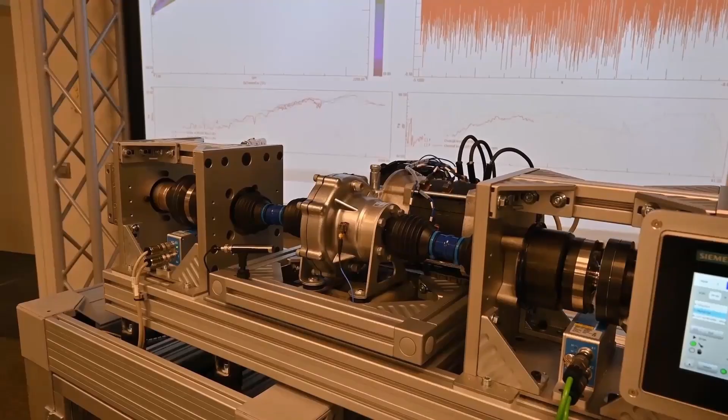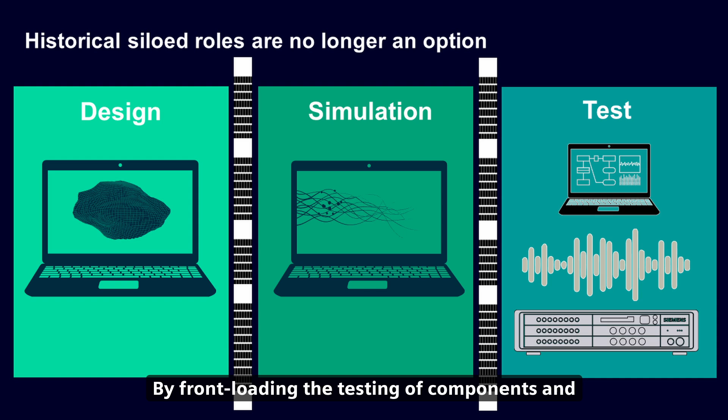To minimize the risk of discovering issues very late in the development cycle, there is a growing need to test the components that make up the full system, and then correlate and update the corresponding simulation model to ensure they accurately predict the real world. So it's critical for physical testing processes to be as accurate, reliable, and efficient as possible. By front-loading the testing of components and integrating tests with simulation, manufacturers can better evaluate many prototypes faster, earlier, and smarter.

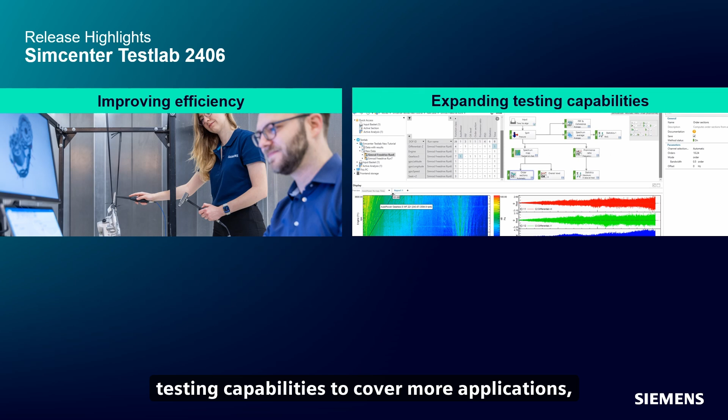With that in mind, the latest release of Simcenter Testlab 2406 is the right tool to help you in your journey to zero prototypes. The key focus areas in this release include improving the efficiency and ease of use, so you get your test results faster, expanding the testing capabilities to cover more applications, managing test data so you know which results go with which design variants, and extending process automation for greater throughput with less error.

On the journey to zero prototypes, the role of testing is definitely changing, but it's not disappearing. Instead, testing time is needed to understand the behavior of the components that will make up the final product. This could mean that even more data needs to be measured than is done today, and so improving testing efficiency is critical to your development process.

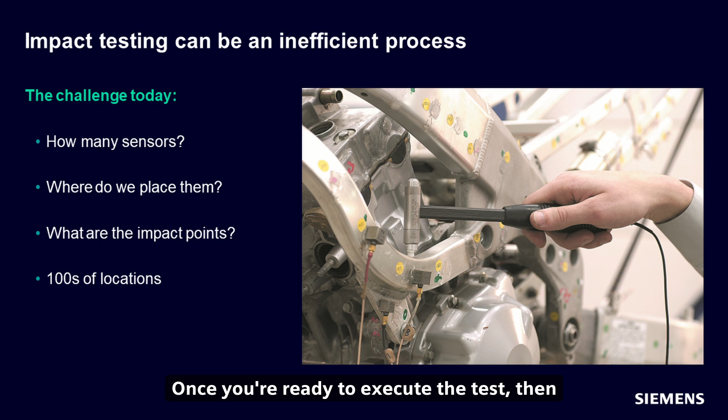Historically, impact modal testing has been an inefficient process. Where will you place the sensors and how many do you need? Where are the impact points? Once you're ready to execute the test, then you might need to hit hundreds of locations with a single hammer. This obviously can take a lot of time. Then, after the test, you need to analyze the data to fully characterize the modal behavior of the component. Now consider that you will have to do this for many components in your product, and you can see the need to improve efficiency.

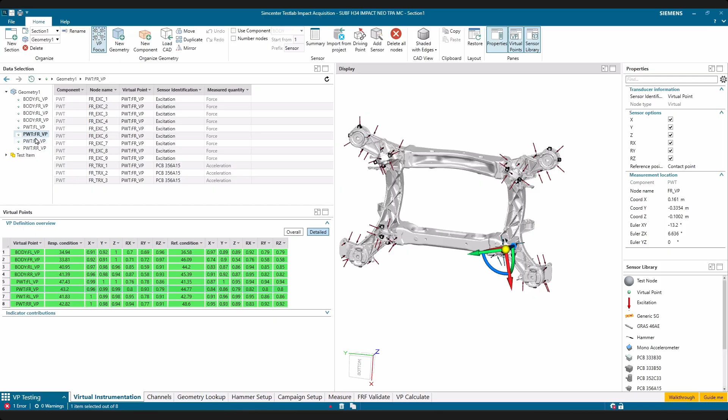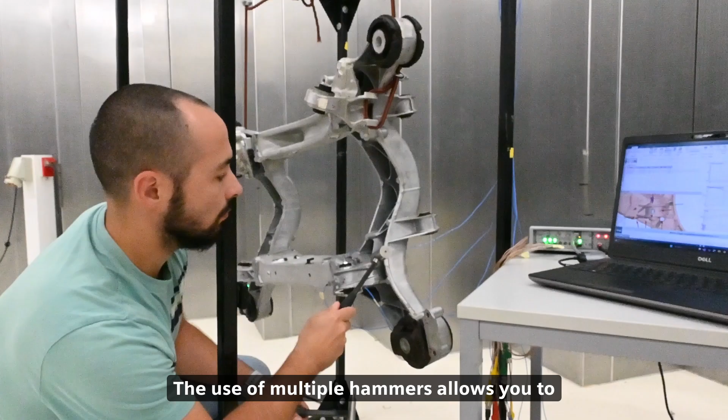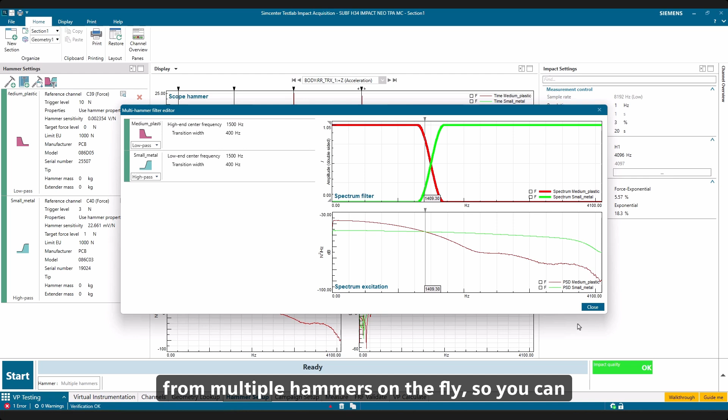With Simcenter Testlab 2406, you can reduce test planning time by using your existing CAD model to help define instrumentation and virtual points. The use of multiple hammers allows you to extend the frequency range, which is necessary for evaluating the unique characteristics of electric vehicles. Simcenter Testlab will then merge the data from multiple hammers on the fly, so you can see results during testing. Additionally, you can review which individual impacts contribute to the FRF, and they can be rejected if they do not meet the desired test quality standard.

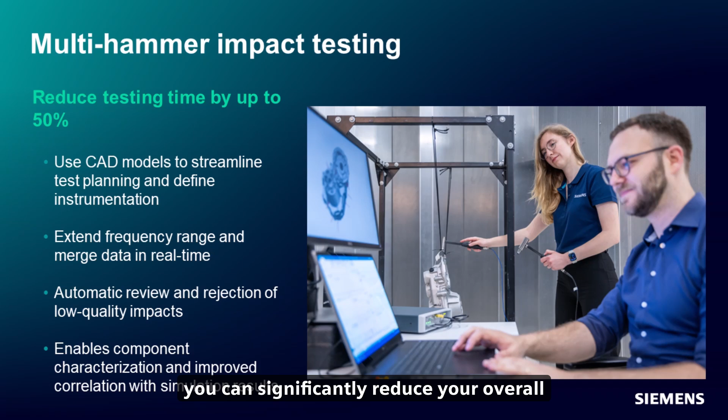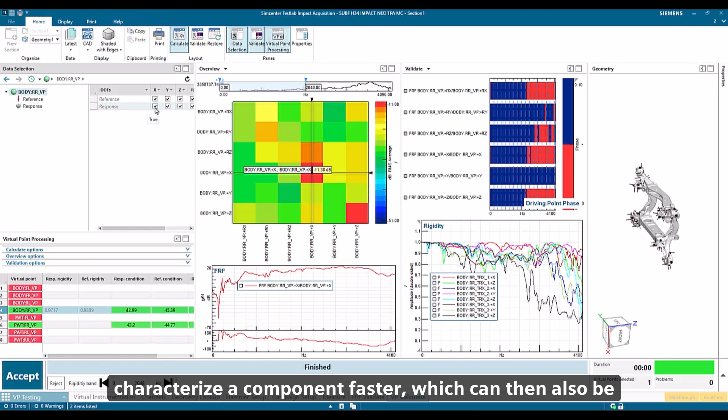Since you no longer need to change hammer every time and manually merge the data, you can significantly reduce your overall testing time by up to 50%, allowing you to cover more impact points in less time. Ultimately, these enhancements help you characterize a component faster, which can then also be correlated with simulation results to improve the virtual models.

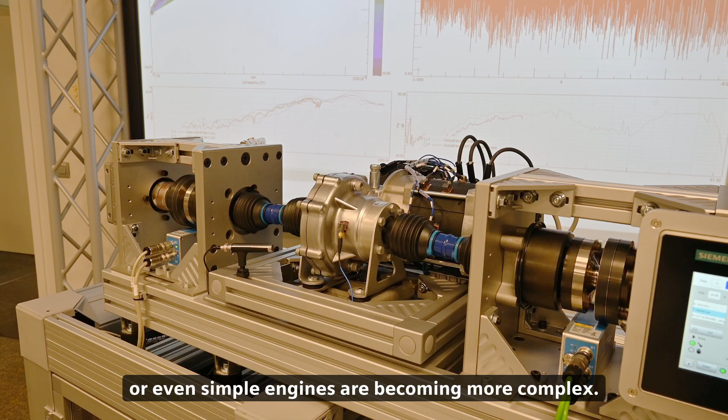Rotating machinery, whether it's an internal combustion engine, electric powertrain, or a small DC motor, is a major source of noise and annoyance towards end customers. Modern designs of gearboxes, complete aircraft, or even simple engines are becoming more complex. As a consequence, NVH testing tools come with so many options, settings, and sometimes hidden features that it's very easy to become overwhelmed, and getting efficient takes time.

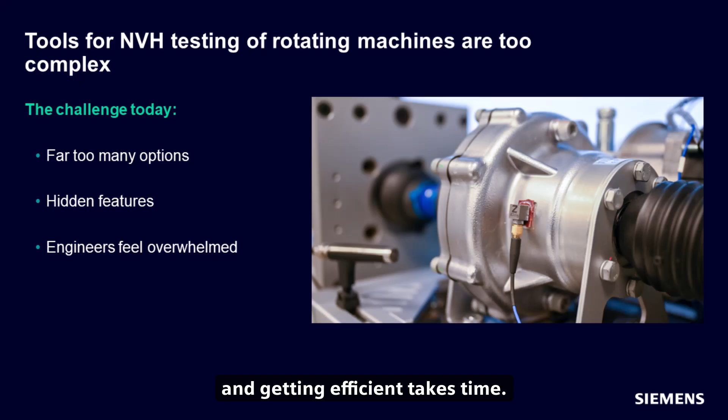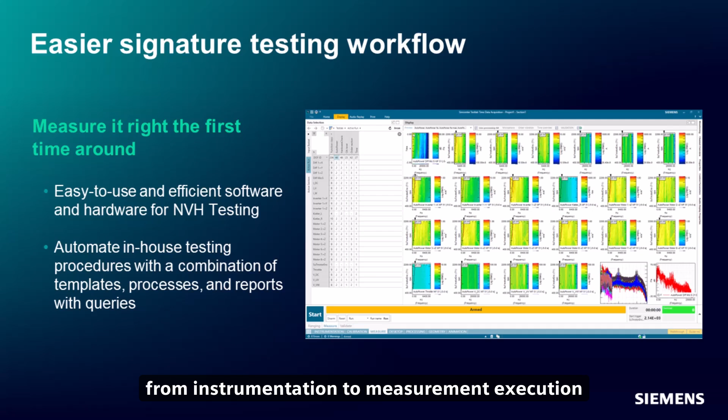A major goal for Simcenter Testlab 2406 was to make it equally easy for an inexperienced test engineer fresh out of school and a hardcore operator with 20+ years of experience on the job to perform a complete signature test. With the 2406 release, Simcenter Testlab Neo supports the complete signature process, from instrumentation to measurement execution and processing, up to reporting and data sharing.

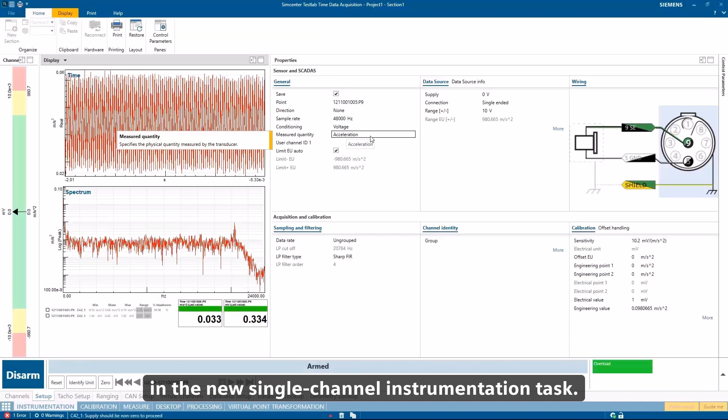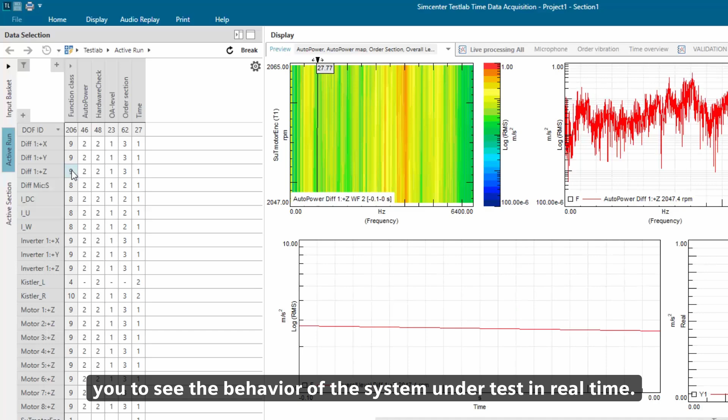Instrumentation is guided and intuitive, supporting both simple setups and multi-channel systems with a wide variety of sensors. The parameter visualization and definition of settings have been made sensor-specific in the new single-channel instrumentation task. Monitoring capabilities have been added to the measure worksheet during execution, allowing you to see the behavior of the system under test in real time. Spectrum maps, order and octave sections, and more can be visualized online with a click of a button.

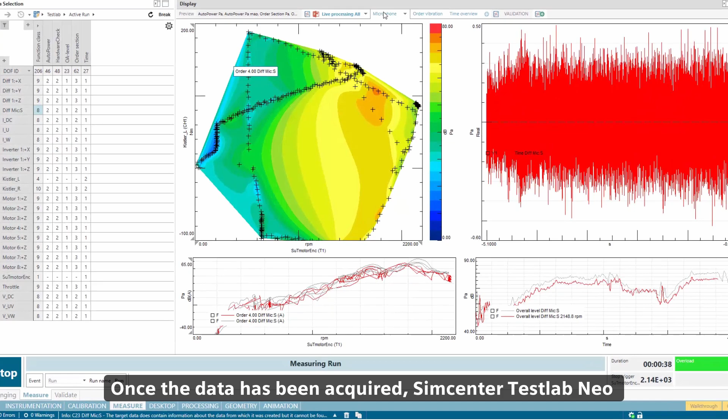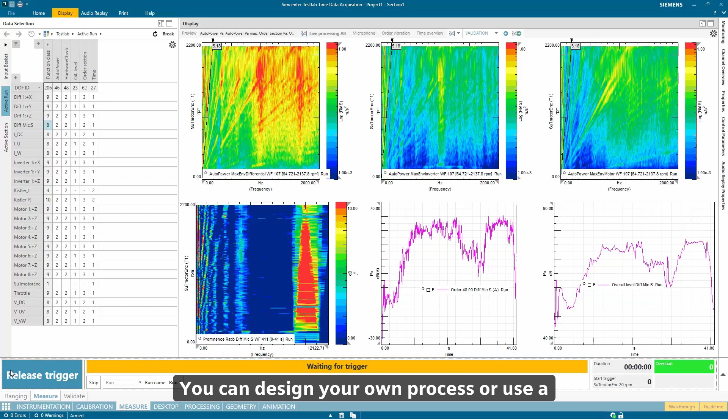Once the data has been acquired, Simcenter Testlab Neo will automatically launch processes and populate results in the measure worksheet to validate the data quality. The process designer offers strong flexibility and a wide range of capabilities. You can design your own process or use a predefined process available with the Simcenter Testlab installation.

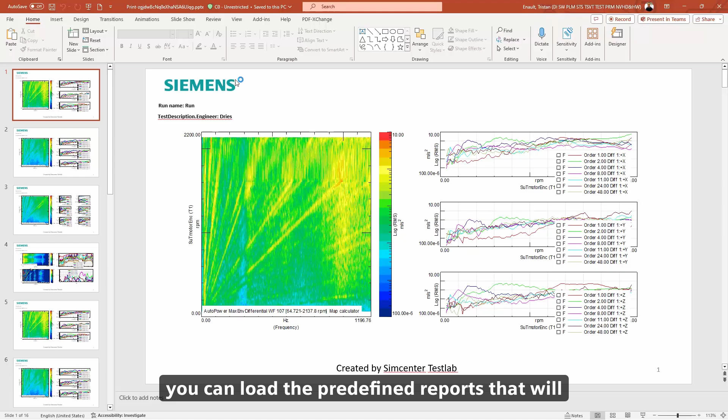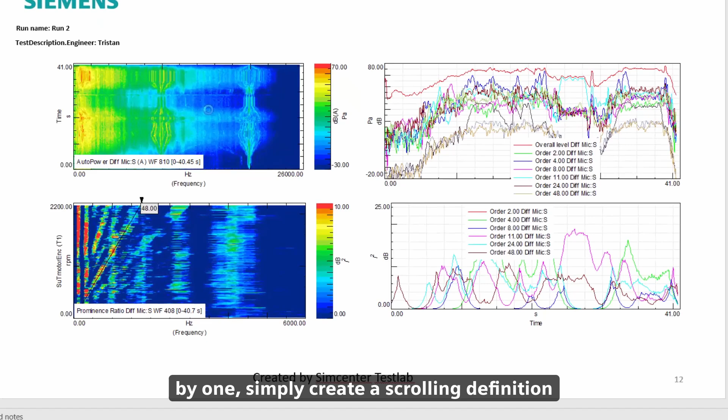Last but not least, once the process is done, you can load the predefined reports that will immediately populate with process results. Rather than tediously building the report one by one, simply create a scrolling definition and automatically build reports with the results and annotations in Microsoft Office. Easy.

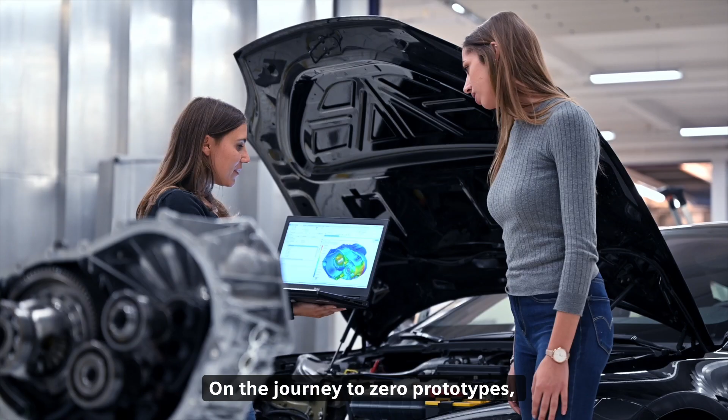On the journey to zero prototypes, the lines between testing and simulation will begin to blur. Testing tools will increasingly need to integrate and share data with simulation tools to correlate results and improve simulation models, feed operational data to durability analysis, and even combine test and simulation data to build complete virtual prototype assemblies.

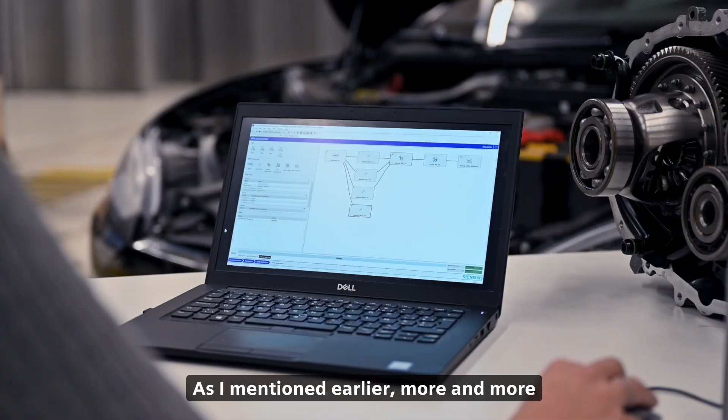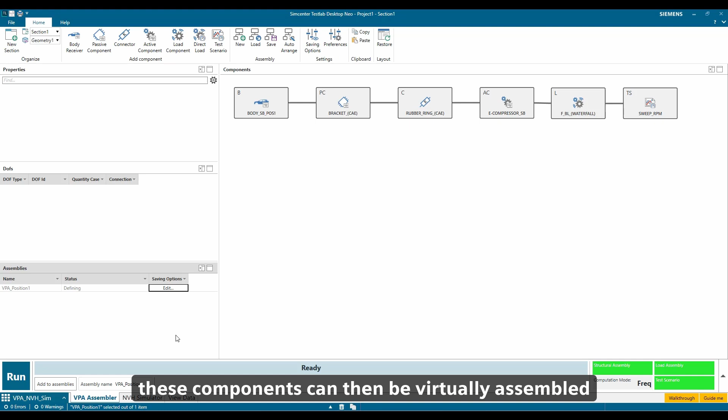As mentioned earlier, more and more testing is done to characterize the performance of the individual components that make up a mechanical product. Test data and even simulation data for these components can then be virtually assembled to create a virtual prototype assembly in Simcenter Testlab. You can then use virtual prototype assembly, or VPA, to understand the performance of the whole system and understand differences when you swap out different components.

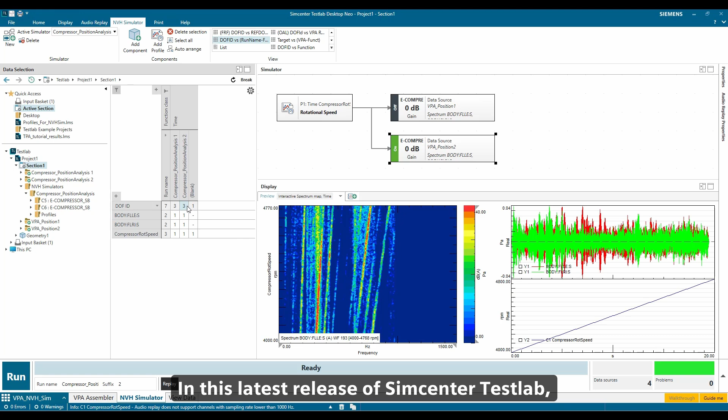This lets you quickly understand how various configurations of your product will perform. In this latest release of Simcenter Testlab, you can also listen to your prototype before you build it.

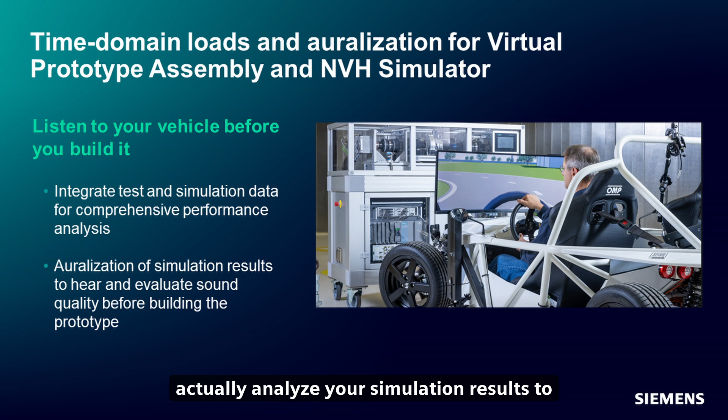Virtual prototype assembly now supports time domain loads, and together with the newly released Simcenter Testlab NVH simulator, you can actually auralize your simulation results to hear what your virtual vehicle sounds like in different conditions. This allows you to develop the perfect experience for your customer and even evaluate against sound quality metrics before the vehicle is even built.

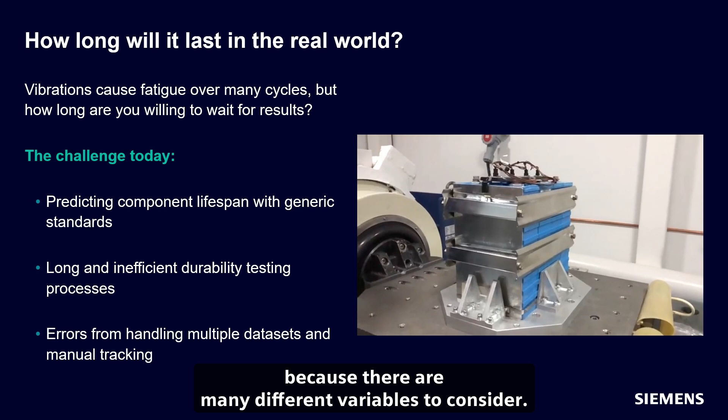Predicting how long a vibrating component will last in the real world is always a challenge for engineers because there are many different variables to consider. First is understanding of the vibration itself.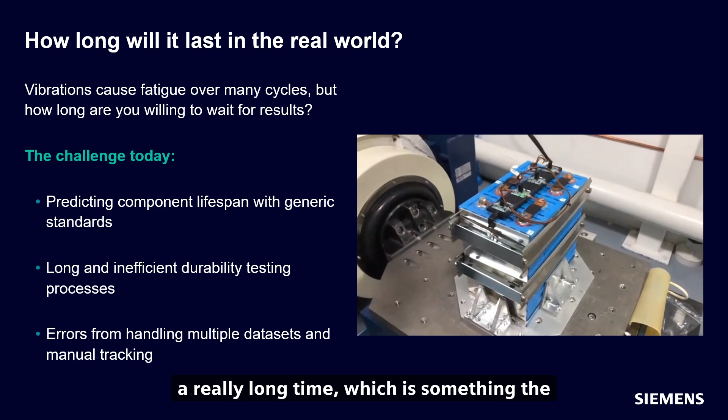Many engineers simply rely on generic standards because they don't have real-world data. Vibrations may not always be equivalent over time depending on the use case. Shaking something until it fails can take a really long time, which is something development teams don't really have. So you need to find a way to accelerate your durability testing to be faster and use more accurate loading conditions.

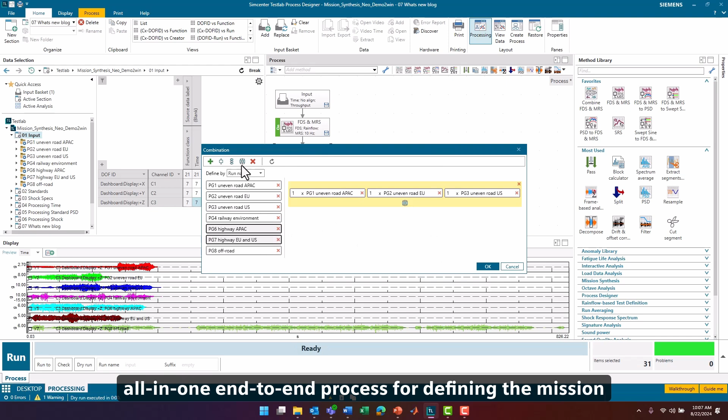In this release, Simcenter Testlab Neo introduces mission synthesis as part of Process Designer. Mission synthesis gives you a streamlined, all-in-one end-to-end process for defining the mission and cases your product will experience over its life, acquiring real-life vibration measurement data, analyzing damage potential and calculating overall damage, and finally synthesizing the test profile.

This solution addresses the inefficiencies of handling multiple datasets and channels, while eliminating the need for manual tracking of sub-combinations that often lead to errors.

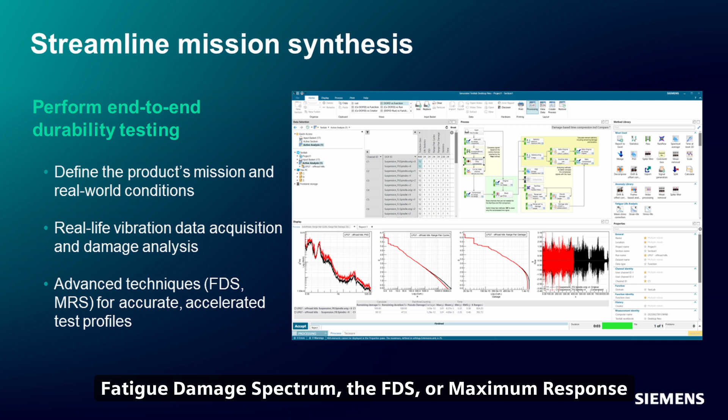By utilizing advanced techniques such as the fatigue damage spectrum, FDS, or maximum response spectrum, MRS, it accurately simulates real-world conditions to predict potential failure points. With multi-domain data acquisition capabilities and powerful analytics, it ensures precise, reliable, and efficient durability testing. This makes it ideal for test houses, automotive manufacturers, and technical labs involved in standardization committees.

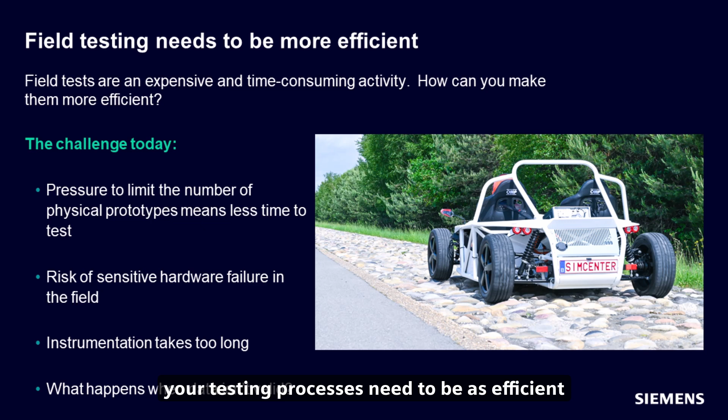A result of the journey to zero prototypes is that companies also want to spend less time on testing than they will need to do. The pressure of having less time to test means your testing processes need to be as efficient as possible, which can be complicated when having to perform field testing such as road load data acquisition, or RLDA.

Typically, RLDA tests require several technicians and engineers to be out at the proving ground. Additionally, they need to bring sensitive hardware and computers out in the elements, which could fail if it's raining and muddy. Instrumenting the test equipment can take hours, and then you need to spend the time for the actual drive and data acquisition.

Further complicating things is that an engineer might not be able to validate the data until they bring all the equipment back to the office. What happens if the data is bad? Unfortunately, it looks like this costly process needs to be repeated.

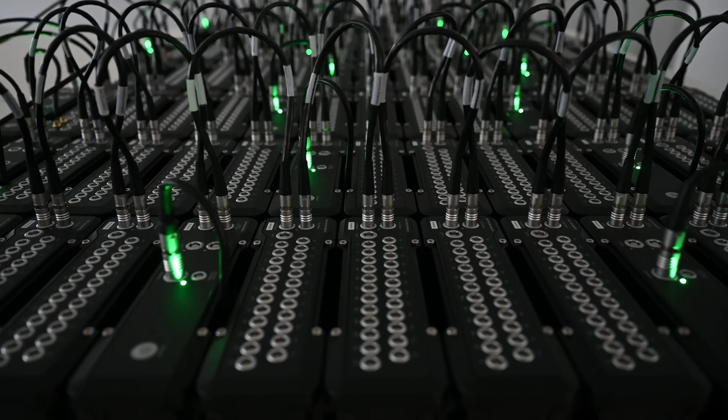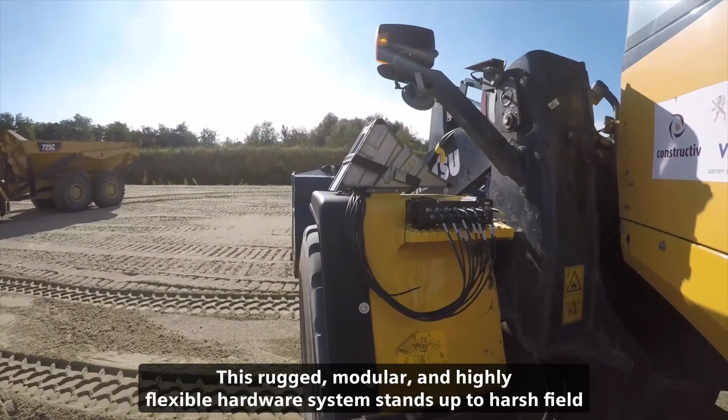Simcenter SCADAS RS, introduced 3 years ago, is the solution to help improve your in-field data acquisition processes. This rugged, modular, and highly flexible hardware system stands up to harsh field conditions and also lets you more efficiently set up pre-test instrumentation.

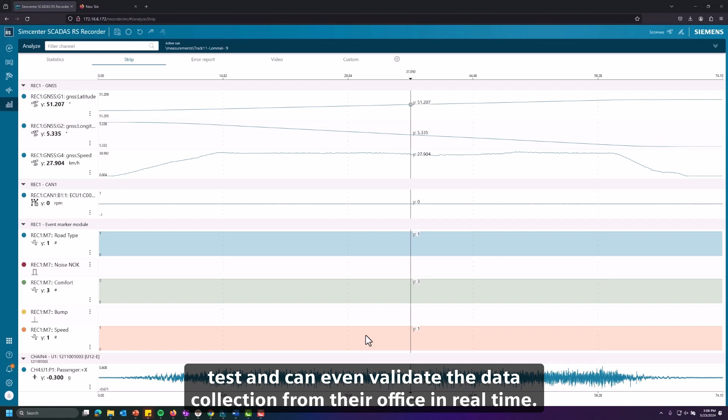Remote connectivity to the system also means engineers don't need to ride along at the test and can even validate the data collection from their office in real time. This means you can detect issues in the field before you've packed everything up for the day.

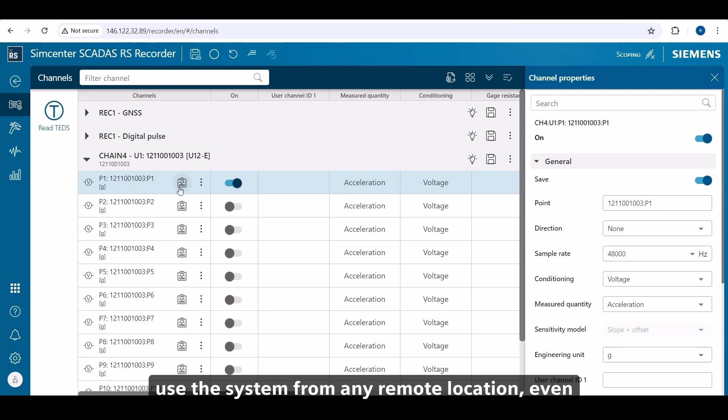We have continued to extend the Simcenter SCADAS RS and its embedded recorder app to further improve efficiency. The recorder app allows you to access and use the system from any remote location, even by multiple people at once for different purposes.

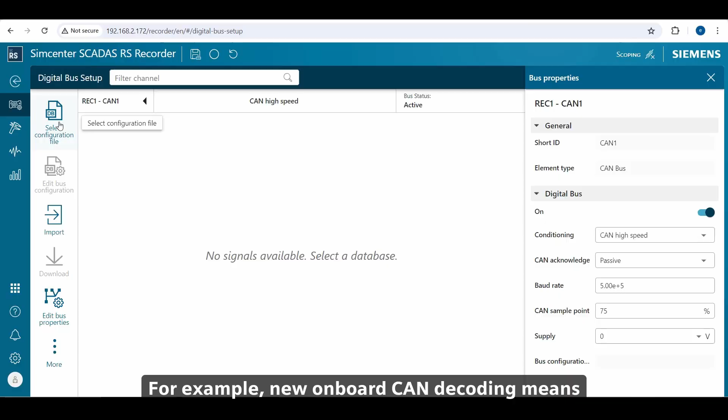Additional usability improvements for SCADAS RS include individual channel setup and in the way CAN acquisition is configured. For example, new onboard CAN decoding means faster testing because all data is directly available for download or trackside validation, with no extra decoding step required outside the SCADAS RS and recorder app.

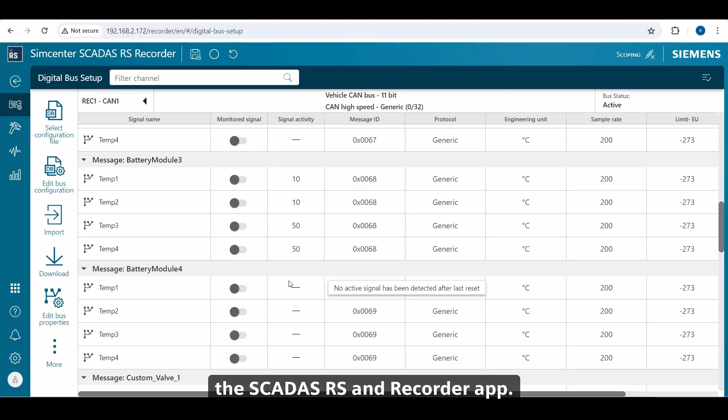While testing out on the track, it can be useful to know what the track conditions are, or if the driver is doing anything differently at some point in time. There are several ways in which the SCADAS RS solutions help here.

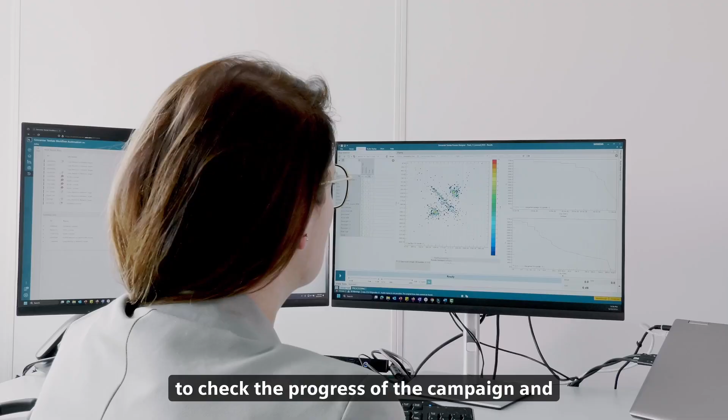First of all, the remote connectivity capabilities allow an off-site engineer to access the live data stream, as well as the recorded data, to check the progress of the campaign and immediately suggest modifications to the driver or to the other on-site engineers responsible for the test execution.

New event marking capabilities with the SCADAS RS recorder app let the driver annotate and mark important events during the drive, which then sync with the testing time data. This lets engineers know how these events might be influencing the data they're analyzing.

New hardware modules, as well as new software functionalities like impact acquisition and signature, widen the scope of applicability of the RS system to other domains like NVH.

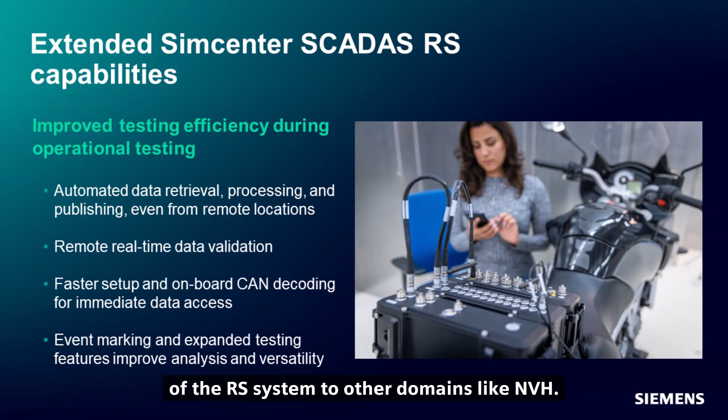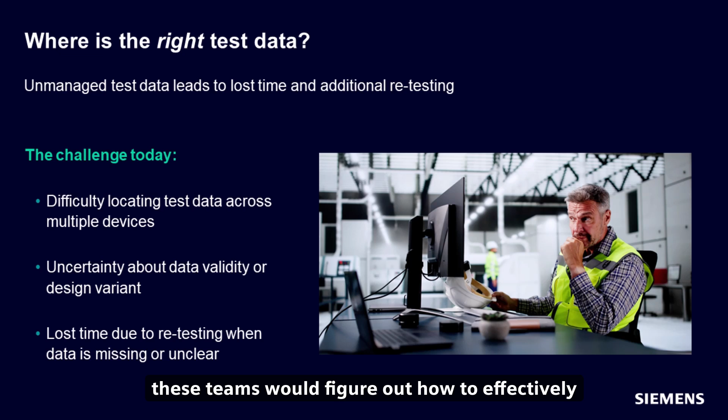There was a time when every subsystem R&D department was an island solving their own issues. Then, after about the 4th or 5th prototype, these teams would figure out how to effectively connect their systems to choose the right design variant. I'm happy to report those inefficient times are over. Simcenter Testlab can help your R&D teams work smarter and collaborate more effectively through a centralized data management and processing solution.

Does this process sound familiar? The development managers ask for a report comparing vehicle A and vehicle B for a number of testing attributes. However, the technician who measured the data has left the company, and so the team must scour various laptops and shared drives to see if they can still find the data. If they're lucky enough to find some testing data, often they don't know which components or design variants the data belongs to, or there is doubt about the validity of the data itself. Ultimately, the team needs to redo the measurement, costing weeks in lost time.

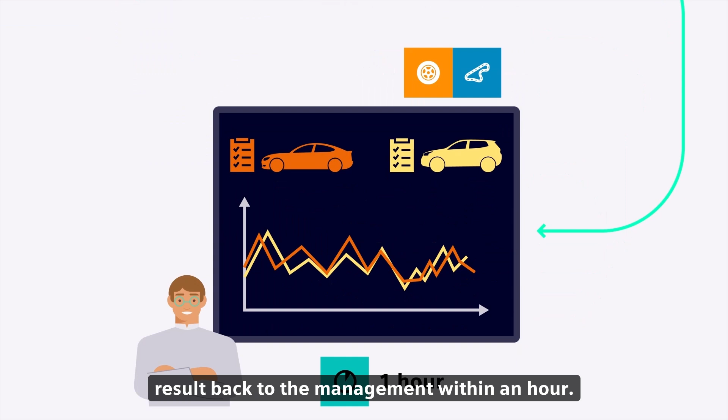Simcenter Testlab Data Management can help rectify this problem and get the comparison result back to management within an hour. Simcenter Testlab Data Management is already a proven system which provides centralized storage for all NVH data, including third-party sources. Engineers and technicians can then consistently annotate test data quickly and easily across different contexts.

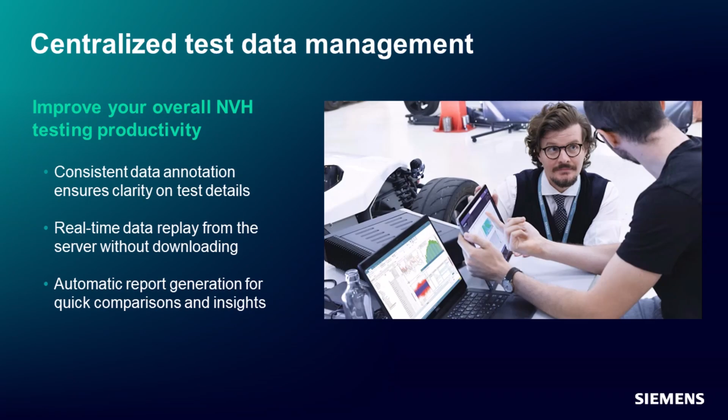In this latest release, we have enhanced data management with support for storing single values, such as statistics or KPIs. You can now also immediately replay the data stored on a central server without having to ever download it locally. In short, a true productivity enabler for any NVH department. And the automatic report generation capability that I mentioned earlier will work on the centralized data as well.

One of the most unique features of Simcenter Testlab Data Management is how seamlessly integrated it is to the existing Testlab platform and interface, so that you might forget you're browsing a dataset stored on a central server and not on your local PC. This helps make data management a breeze rather than an additional chore.

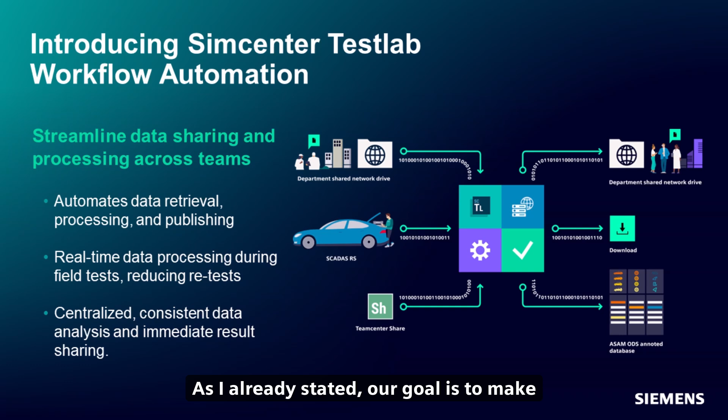The last new addition to the Simcenter Testlab family is for sure not the least important one. As I already stated, our goal is to make your job easier by creating tools that will make you more efficient and help deliver the required results much faster. And that's exactly what Simcenter Testlab Workflow Automation, or TWA, does.

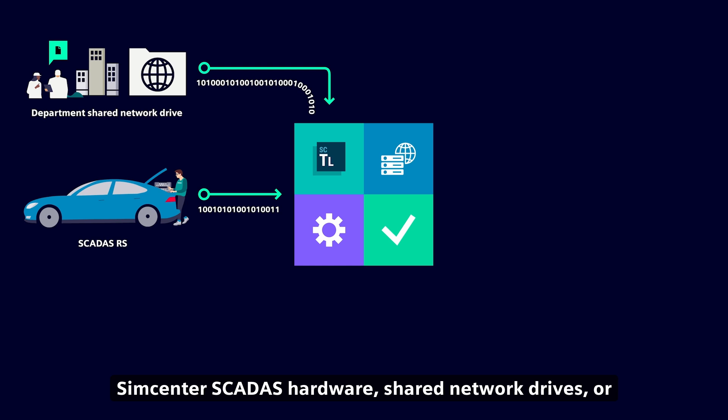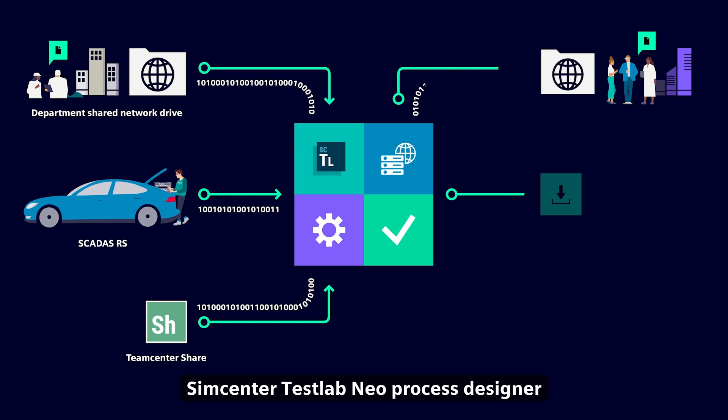TWA automatically retrieves, processes, and publishes data coming directly from Simcenter SCADAS hardware, shared network drives, or Teamcenter Share, the Siemens cloud collaboration solution. Simcenter Testlab Neo Process Designer, running on a server, automatically post-processes all of that data. You can then immediately publish the results to Simcenter Testlab Data Management or publish them to a shared network drive.

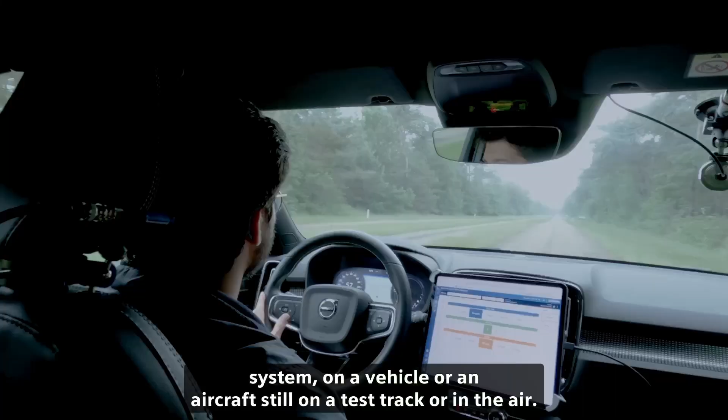Workflow automation opens up a lot of new possibilities. For example, think back to our earlier discussion about remote field testing. You can now remotely access test data that is currently being measured on a SCADAS RS system, on a vehicle or an aircraft still on a test track or in the air. Every measurement gets processed immediately and the results are stored centrally, all while the test drive or the flight is still completing all the maneuvers.

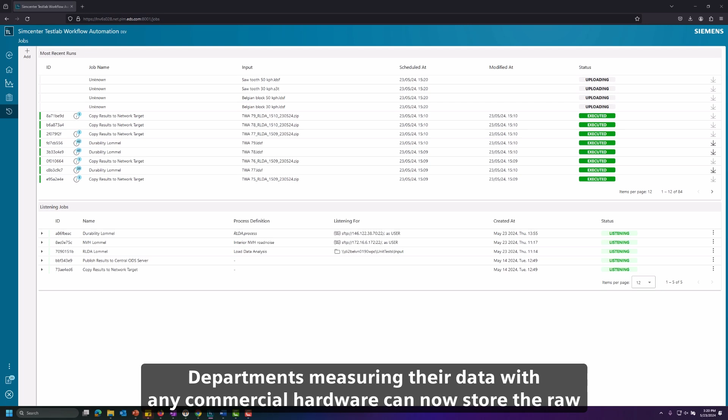Engineers in the office and on-site can review and determine if they have the data they need and eliminate the need for future retests. Another potential use case for workflow automation is through a centralized processing hub. Departments measuring their data with any commercial hardware can now store the raw results in a previously agreed upon folder. TWA will then make sure that the data is always analyzed in a consistent way that your team has already defined, and then post results in a central location.

With the combination of Simcenter Testlab Data Management and Simcenter Testlab Workflow Automation, you can democratize data and processing all at once. As you can see, this latest release of Simcenter Testlab contains many new capabilities to help you test faster, smarter, and earlier. And these were just the highlights.